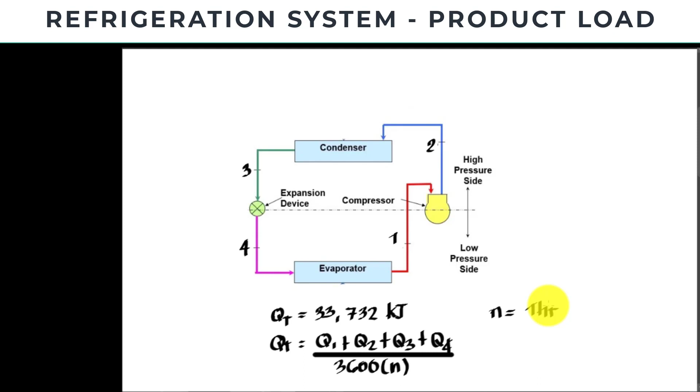So assuming the load can be removed in 1 hour, I can now compute or design the refrigerating load of my evaporator, which will be the Q, 33,732. Now this is all divided by 3,600. Usually the 3,600 is the conversion to seconds. Now let me break this down.

This is 1 hour. Let's try to break this down. If you're going to convert the 1 hour, 1 hour is equivalent to 60 minutes. So let's have a good conversion here. And 1 minute is equal to 60 seconds. Now canceling our units here, removing the hours and also the minutes, we have seconds. So if you multiply 60 times 60, that is equal to 3,600. So that's why there's 3,600, just to simplify the conversion for the equation.

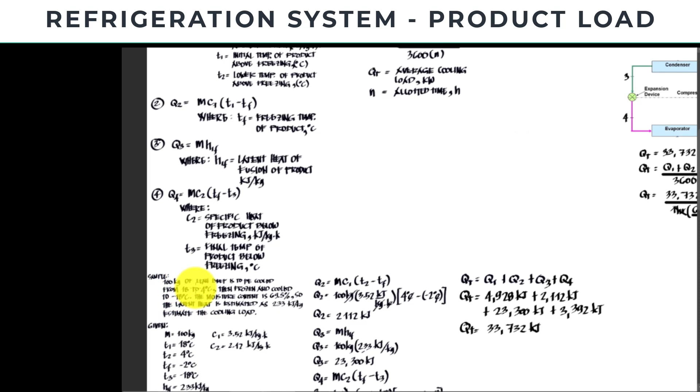Okay, so let's start to give the data for the values of our refrigerating system. So, what will be the temperature of the evaporator? That's a good question. Let's go back to the problem stated. So that is 100 kilograms of beef, to be cooled from 4 degrees, then frozen and cooled to negative 18.

The freezing temperature is assumed to be negative 2. Now, you'll notice negative 18. We'll be using negative 18 because that is the storage temperature or the final temperature of the product. In order to keep the product at its desired temperature, we'll use negative 18. There are times a lower temperature is given. What happens is we have the thermostat to control it. Once the temperature reaches negative 18, you can stop the operation of the system.

But especially for manufacturers dealing with blast freezers, especially multi-function blast freezers, sometimes the temperature is lowered even more. So you can adjust and deviate the temperature to different levels, whatever lower temperature you want, and you can adjust the thermostat to set the desired temperature.

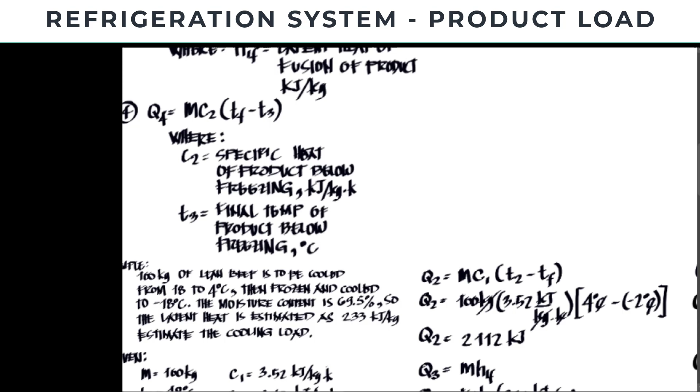Now for us, since the problem gives only negative 18, we'll stick to negative 18 and use that as the temperature of our evaporator. So I will place here negative 18 degrees Celsius for my evaporator temperature. Next, we also have to write the temperature of our condenser. Let's give this a temperature of 34 degrees Celsius. Okay.

Now for demonstrations here, the refrigerant circulating the system will just be ammonia, R717. Okay, so we'll be using that as the refrigerant cycling the system.

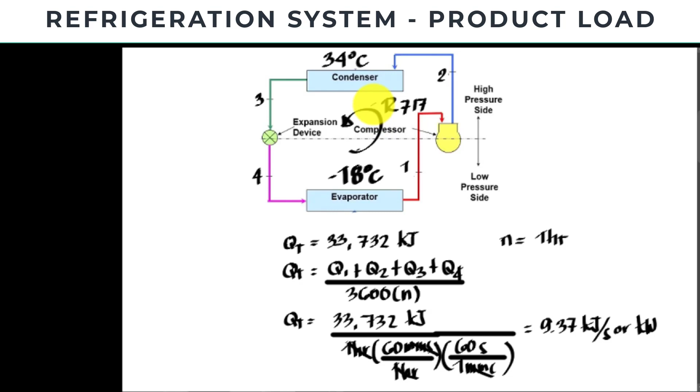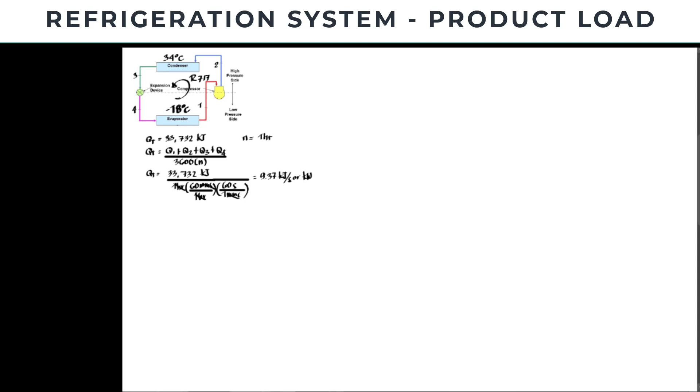Now for the properties, I'll bring down here the table of properties for R717. This is my shortcut table, so all of you have the tables too. Okay, so I will be listing down here the properties. So that will be at point 1.

At point 1, the temperature is negative 18 degrees Celsius. So at point 1 we have the enthalpy, that will be hg at negative 18 degrees Celsius, since this is already vapor. Looking at the refrigerant properties, the enthalpy is classified in two. For vapor we have the value of 1440.39 kilojoule per kilogram. Okay.

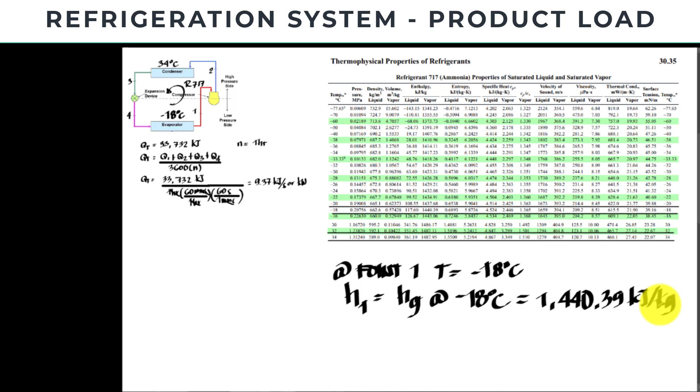That's enthalpy 1. Now we need the properties for enthalpy 2, so we'll be using the pH diagram. I'm bringing down here the chart for 717. It is negative 18, and we have here negative 20, so let's plot that initially. The values go from the saturated liquid line to the saturated vapor. So we have here the location of negative 18, somewhere at 1,400.

Now let's compare that with the values we saw. Negative 18 is 1,440 in terms of vapor. So we can also extend this to match the value, since in between is 1,500. Let's undo this and increase the distance so it lines up with 1,400, so it's the same value. Then we have here point 1. So this is my point 1.

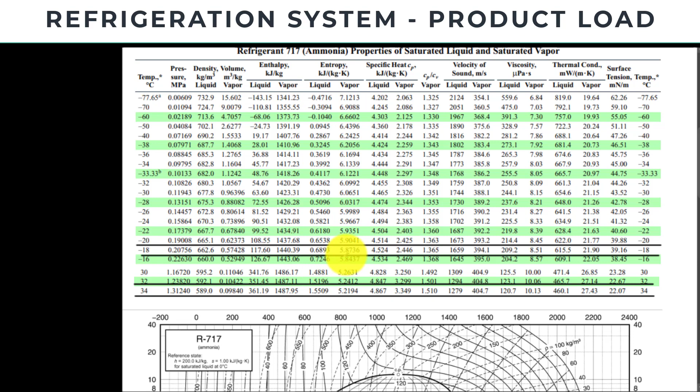Now, since we have isentropic compression between point 1 and point 2, I can write that S1 is equal to Sg. From the table at negative 18, the entropy in terms of vapor is 5.8736 kilojoule per kilogram Kelvin.

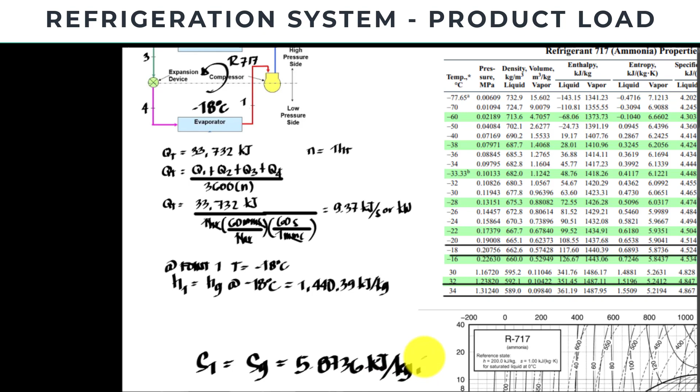Let's put this on the pH diagram and plot it. This is 5.87, and we have here 5.6 and 6.0. If we draw a line parallel with this 6.0, we get the intersection, which gives the location of our point 2. Now let's draw a line to find the location of this one.

This can be approximated as 1670 kilojoule per kilogram. Writing that down here in our table of properties, that's 1670 kilojoule per kilogram, coming from the pH diagram.

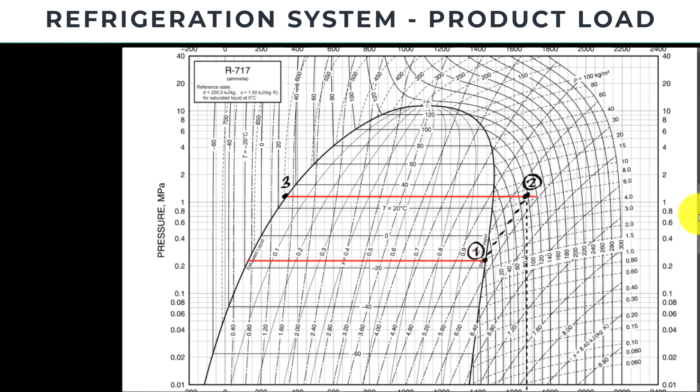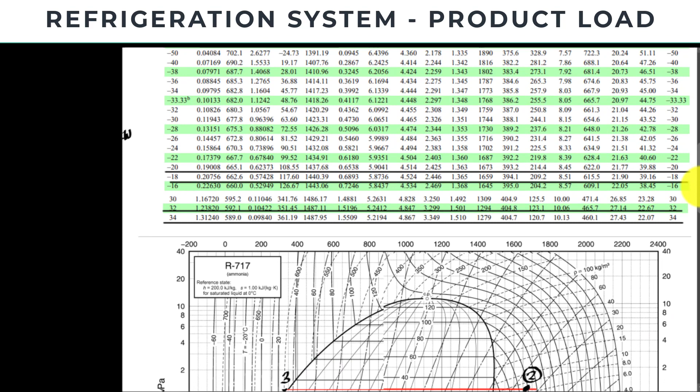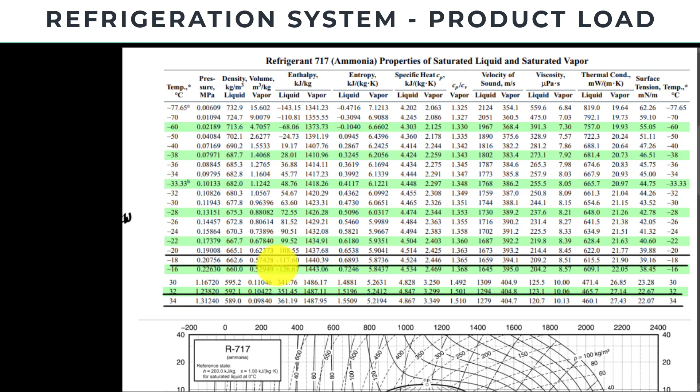Going back to the pH diagram, let's determine the properties at point 3. It can be determined using the pH diagram, or we can also use the table. So that is 34. That is already in the liquid state, since this is the saturated liquid line, so we use the enthalpy of the liquid state. At 34, we have the value of 361.19 kilojoule per kilogram.

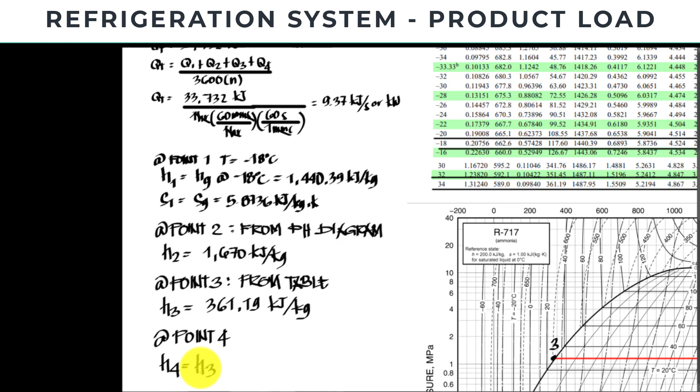Now for point 4, usually the enthalpy at point 4 is equal to enthalpy 3, since we have a constant enthalpy process from point 3.

So we have now here the intersection, so this is my point 4, okay? So we are able to complete now the cycle, okay? And we can now truly compute the process here to size the compressors and condensers, and the mass flow rate required by the system.

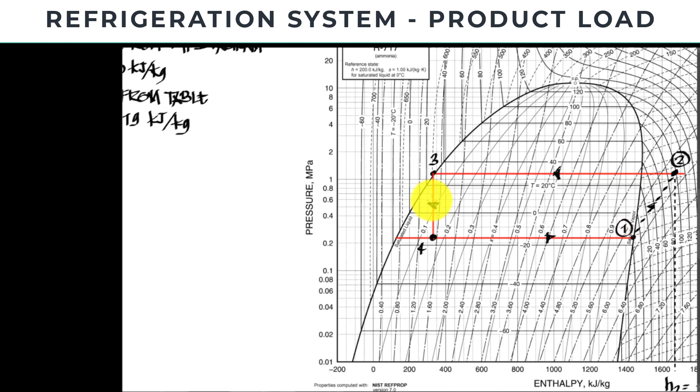Now to get the mass flow rate of the refrigerant, this is simply your Q total. So I will be equating that to the Q of our evaporator. So Q of the evaporator will be equal to the mass flow rate times the change in enthalpy from 1 to 4. So that's what we need. Change in enthalpy from point 1 to 4, that will be enthalpy 1 minus enthalpy 4. So that will be the equation.

So our load will be 9.37 kilowatts. So we can rewrite here 9.37 kilojoules per second, which is equal to our mass flow rate, times the change in enthalpy from point 1 to point 4. Our point 1 value is 1,440.39. And our enthalpy 4 will be equal to enthalpy 3, which is 361.19. And the units are kilojoules per kilogram.

Okay, that's it. That completes the solution. This is just to show you, for a simple refrigeration system, applying the product load. Later on, we'll also be applying that on multi-pressure systems, cascade systems, air refrigeration systems and steam jet refrigeration systems. So every load will be calculated based on the different properties of the material or the product that is the load of the evaporator.